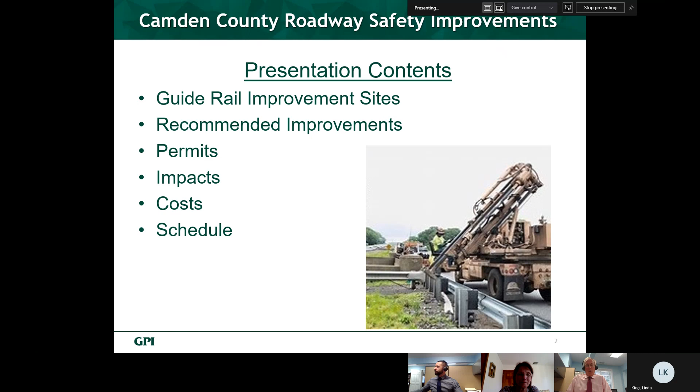This presentation is about 15 to 20 minutes long. During the presentation, we will locate the improvement sites, describe existing conditions, explain proposed improvements, and summarize cost and impacts.

As Kevin had mentioned, this is a federally funded program. It's funded through the Federal Highway Administration, commonly referred to as FHWA. The project is being developed through the local lead program of New Jersey Department of Transportation, Division of Local Aid and Economic Development. It's a cooperative venture that includes partnership by FHWA, New Jersey Department of Transportation, Delaware Valley Regional Planning Commission, and the program will be administered by New Jersey Department of Transportation Local Aid.

Camden County was successful in securing federal funds for the engineering, design, construction, and construction inspection. The funding for this project can only be used for the scope of work described in the original grant application, and the funds cannot be applied anywhere else.

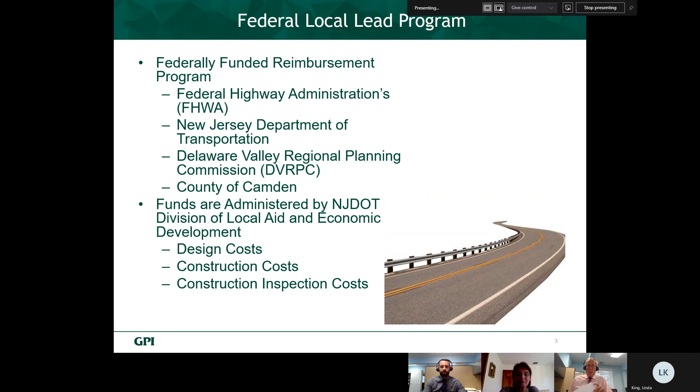Project was originated by Camden County to update existing guide rail systems on heavily traveled roadways to the latest guide rail standards adopted by New Jersey Department of Transportation, and to evaluate other sites for potential roadway hazard that warrant guide rails. In January of 2019, New Jersey Department of Transportation updated their guide rail standards to conform to the Midwest guide rail system.

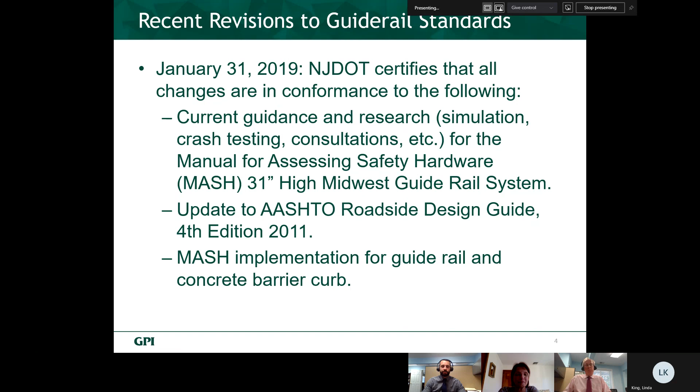Therefore, we had to do an assessment of the existing guide rail systems and design improvements that are in general conformance with New Jersey Department of Transportation updated design guidance. Just to give you a couple of ideas of some of the revisions: they are now setting the guide rail height 4 inches higher than what it used to be, mainly due to the number of SUVs and trucks being sold in the United States, whereas before the mix was greater cars, but no longer is that the case. We are also amending end treatments and revising curb heights to a maximum of 4 inches.

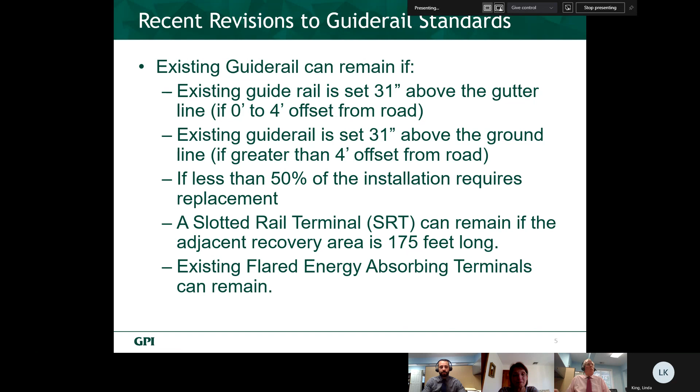As previously mentioned, the guide rail improvements are planned for various sites along Evesham Road and White Horse Road in Cherry Hill and Voorhees Township. The project evaluated 12 sites for guide rail improvements. 10 of the sites had existing guide rail installations and 2 sites had no guide rail. Each site was analyzed to determine if guide rail was warranted, and the existing installations were compared to current guide rail standards. Some sites were eliminated from this project due to permitting requirements, right-of-way implications, and budgetary constraints.

Improvements are planned for 9 sites. Guide rail design was performed to avoid requiring easements, right-of-way relocations, while minimizing environmental impacts. Sites are numbered on the display boards that were posted on the County Public Works website for this project. Sites 1, 2, and 7 were eliminated from the contract.

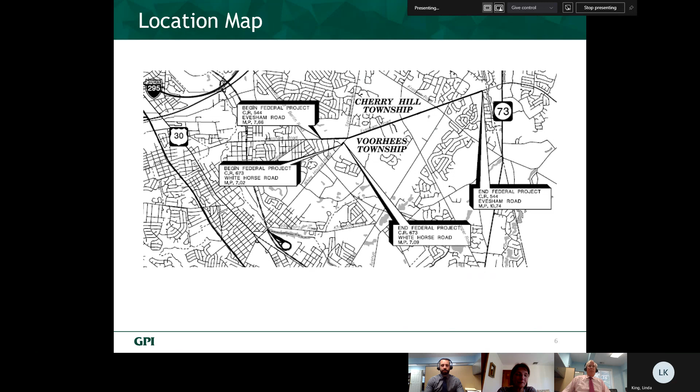This is Site 3 at milepost 7.7 on Evesham Road westbound between Haddonfield Road and Springdale Road, more specifically between Glen Drive and Dale Drive in Cherry Hill Township.

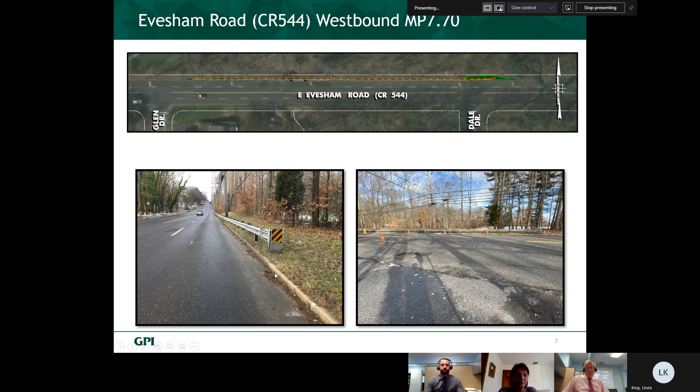The work consists of installing a new tangent guide rail terminal at the east end, shown here, replacing the existing concrete curb with new 4-inch reveal. The existing curb is anywhere from 6 to 8 inches of reveal, and restoring the area disturbed by construction activity.

Work at Site 4, which is immediately across the street from Site 3, is again at milepost 7.7 on Evesham Road eastbound between Haddonfield Road and Springdale Road, more specifically between Glen Drive and Dale Drive in Voorhees Township.

Replacing the existing concrete vertical curb with new 4-inch curb and a depressed curb at the pump station driveway. Replacing the concrete gutter in this area. Replacing the drainage inlet casting curb piece, because right now they're set for a 6 or 8-inch high curb. They have to be brought down to a 4-inch curb, and also conform with the latest stormwater management regulations, and restoring the area disturbed by construction. Due to the MUA pump station driveway, the guide rail here is in 2 sections.

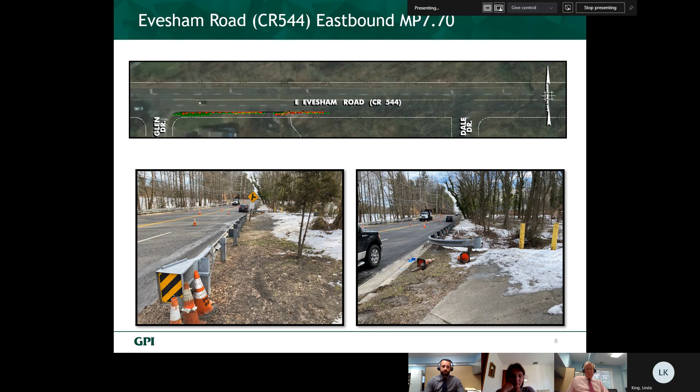Installing a new tangent guide rail terminal at the east end, replacing this terminal end, installing beam guide rail anchorage at the far end of the guide rail, installing or replacing the existing concrete curb with new 4-inch reveal curb and a depressed curb across the front of the driveway, replacing the drainage inlet casting curb piece, and restoring the area disturbed by construction.

This guide rail installation again is broken up into 2 sections because of the driveway, which has masonry pillars within the clear zone and also a utility pole that's also in the clear zone. Both of those represent hazards when designing guide rails.

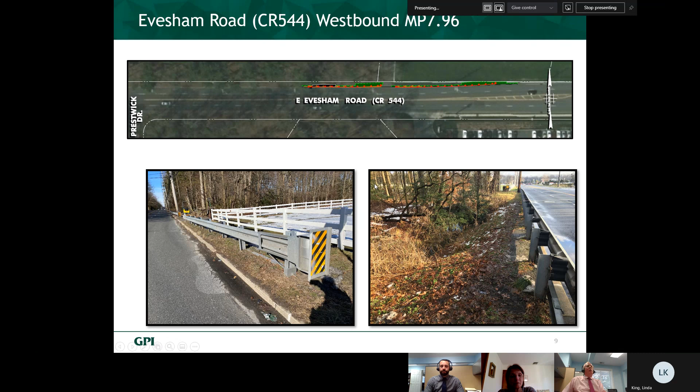Site 6, again immediately across the street, located at milepost 7.96 on Evesham Road, between Prestwick Drive and Springdale Road in Voorhees Township, consists of replacing the existing guide rail, installing a new terminal guide rail end.

Installing new beam guide rail anchorage at the east end, which is this end of the guide rail, replacing the existing concrete curb with new 4-inch curb, replacing the drainage inlet casting curb piece, and restoring the area disturbed by construction.

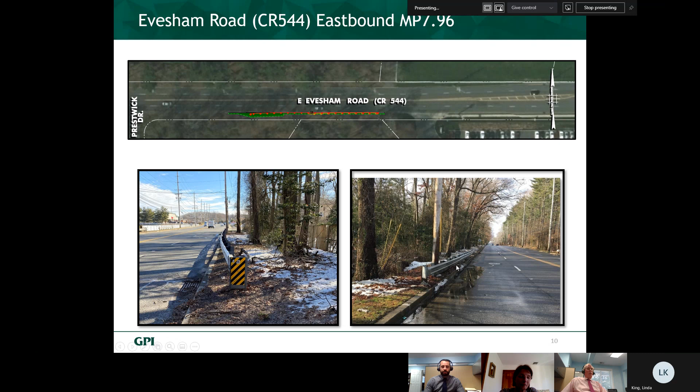Located at milepost 7.07 on Whitehorse Pike northbound between Haddonfield, Berlin Road and Evesham Road, more specifically between Keswick Drive and Evesham Road in Voorhees Township.

Sorry, Dale, it's White Horse Road, not Whitehorse Pike. Very sorry, different, very different. Sorry about that. Yes, White Horse Road northbound. Sorry.

The work consists of installing a new guide rail system where none exists today to shield errant vehicles from the concrete culvert head wall and the deep drainage ditch, shown here in the pictures below. This is about a 5-foot drop off at this location, maybe a little bit more. I believe the pipe is 5 feet.

Installing a tangent guide rail terminal at the south end and installing an anchorage terminal at the north end. Due to conflicts with the culvert pipe, we have to install a reinforced concrete slab and anchor the guide rail to the concrete slab because we cannot drive posts where the culvert pipe is.

Replacing the existing curb through here with new 4-inch curb, replacing the drainage inlet casting curb piece, and restoring the area disturbed by construction.

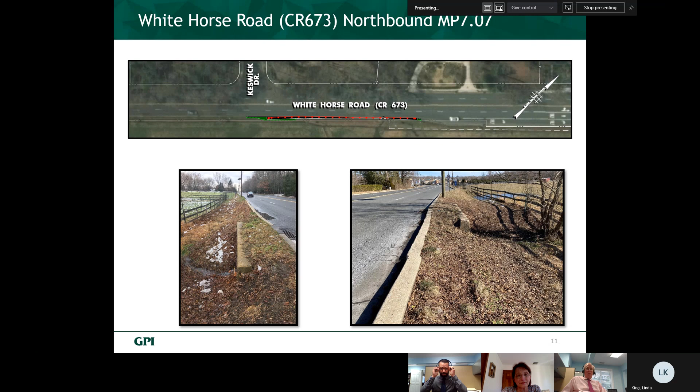Moving on to Site 9, we go back up onto Evesham Road. Site 9 is located at milepost 9.50, westbound between Cooper Road and Crescent Road, more specifically between Lapley Court and Main Street in Cherry Hill Township.

This work consists of replacing the existing concrete vertical curb with new 4-inch curb and a depressed curb across the driveway, replacing the drainage inlet casting curb pieces, relocating the mailbox from the west side of the driveway to the east side so it's out of the guide rail, and replacing existing shrubs with new shrubs on the east side of the driveway.

Restoring the area disturbed by construction. Unfortunately, guide rail design standards do not permit trees or shrubs within 12 feet of the back edge of the guide rail in a recovery zone. At this site, 12 feet is roughly the location of the existing fence here.

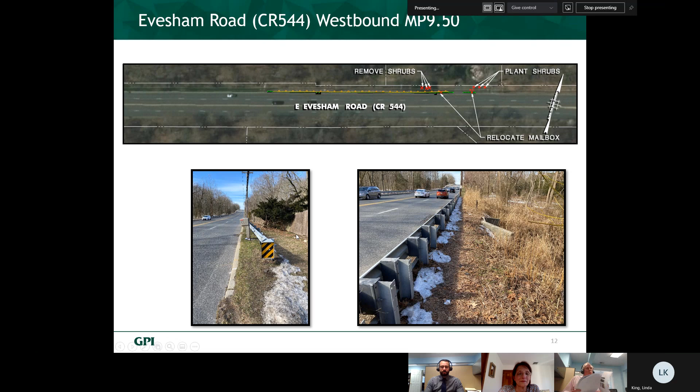Moving on, Site 10 is across the road from Site 9 at milepost 9.5 on Evesham Road eastbound, between Cooper Road and Crescent Road, more specifically between Lapley Court and Main Street in Voorhees Township.

This consists of replacing the guide rail, installing a new tangent guide rail terminal at the west end, which is shown here, installing beam guide rail anchorage on the east end, which would be the far end of the guide rail, replacing the existing concrete vertical curb with new 4-inch curb, replacing the drainage inlet casting curb piece, and restoring the area disturbed by construction.

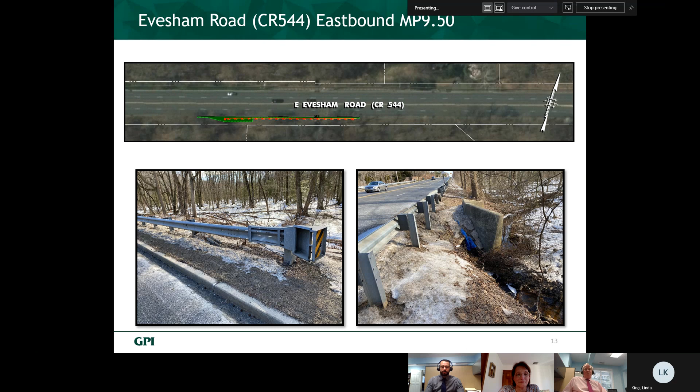Moving on to Site 11, which is at milepost 10.67 on Evesham Road westbound between Crescent Road and Route 73, more specifically between Bentonwood Drive and Peregrine Road in Cherry Hill Township.

This work consists of extending the existing guide rail eastward, installing a new tangent guide rail terminal end, replacing the existing concrete vertical curb with new 4-inch reveal curb, replacing the drainage inlet casting curb pieces, and restoring the area disturbed by construction.

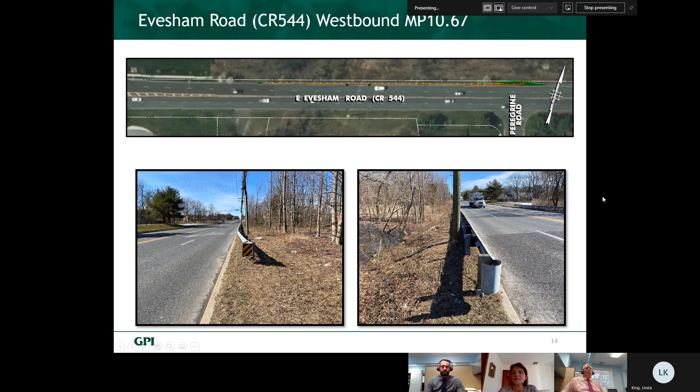And the last work site is Site 12, located at milepost 10.67 on Evesham Road eastbound, across the street from Site 11, more specifically between Bentonwood Drive and Peregrine Road in Voorhees Township.

Installing a beam guide rail anchorage at the east end, which is the far end of the guide rail. Replacing the concrete curb with new 4-inch reveal curb and a depressed curb across the driveway. Replacing drainage inlets with new, bigger double B inlets, which are twice the size of the existing, and restoring the area disturbed by construction.

All these sites are shielding errant vehicles from going off the road and into the ditch where culverts exist underneath the road.

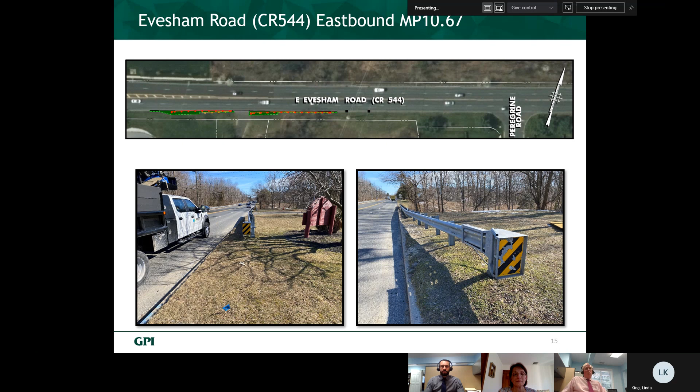Permits. Work has been designed to fall under the New Jersey Department of Environmental Protection Permit by Rule 41, which authorizes the placement of guide rail adjacent to a lawfully existing public road, following certain conditions such as the ones listed here.

The guide rail is required and overseen by a public entity with jurisdiction over the roadway. No riparian zone vegetation is cleared, cut, or removed except within 4 feet of the guide rail, and no trees are cleared, cut, or removed from the riparian zone within 25 feet of the top of bank.

In most cases, the guide rail is being replaced in the same location as existing, without the placement of non-vegetative surface under the guide rail, which is typically installed to control vegetation and soil erosion at these locations.

A soil erosion sediment control certification is required from the Camden County Soil Conservation District due to the disturbance of more than 5,000 square feet of land.

Where a curb is being replaced, a 2-foot section of asphalt pavement is being removed to allow for the placement of concrete forms, and this strip will be resurfaced upon removal of the forms.

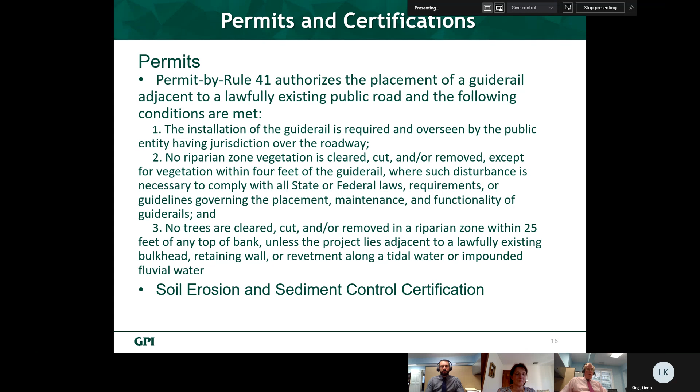Since this project will receive Federal Highway Administration funding, the project must comply with federal requirements for minimizing impacts to historic resources. This is referred to as the Section 106 process. New Jersey Department of Transportation will lead the Section 106 process for this project, which includes the following steps.

Initiate the 106 process, which establishes the undertaking for which this project consists of the proposed improvements. Identify historic properties or features. For this project, they include the Gilmore House, the Holly Ravine Farm, and the Inskeep Homestead, a farm historic district. They will assess adverse impact of the improvements on the historic features, and resolve adverse impacts or effects by avoiding, minimizing, and mitigating.

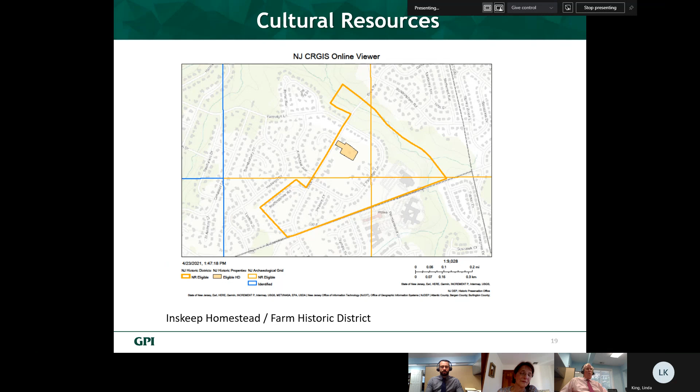Construction impacts: the roadway section where these improvements are planned has at least two lanes in each direction of travel with no shoulders. Therefore, work under this contract will require closure of the right lane. Sometimes the closure will extend for several days and nights because of the need to keep forms in place while replacing the curb, and not having enough work area to do the work otherwise. Lane closures will be limited to weekdays.

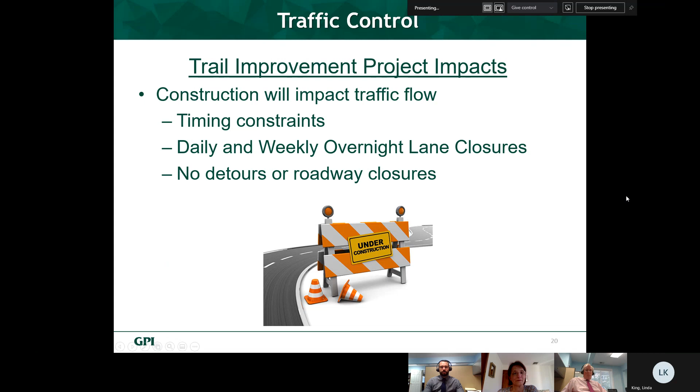Project cost: the estimated cost of this project is approximately $600,000. Costs are to be reimbursed with federal funds through the New Jersey Department of Transportation, Local Aid District 4 office.

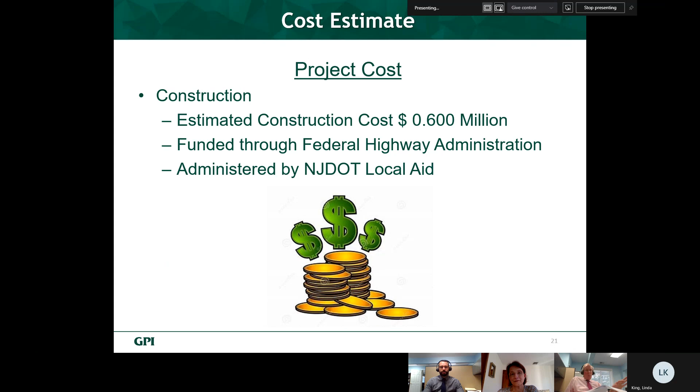The anticipated schedule: currently the project is in the final design phase. Remaining activities include completing the public involvement process, which is what we're involved in right now, securing authorization for construction, and making final revisions to the contract documents. Construction is anticipated to occur during the spring of 2022 and should take about three to four months to complete.

You are encouraged to provide input and suggestions about the proposed improvements to the project team using the survey form, where the link to the form is on the Camden County Public Works website. Please be sure to submit the form during the comment period, which closes on July 14, 2021.